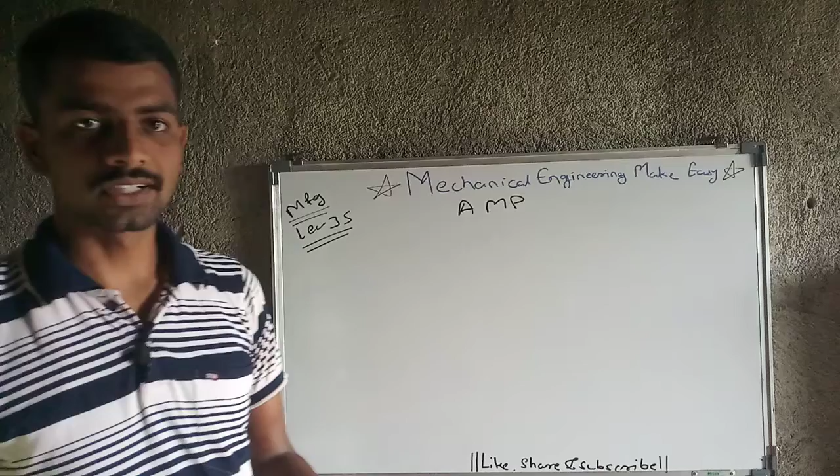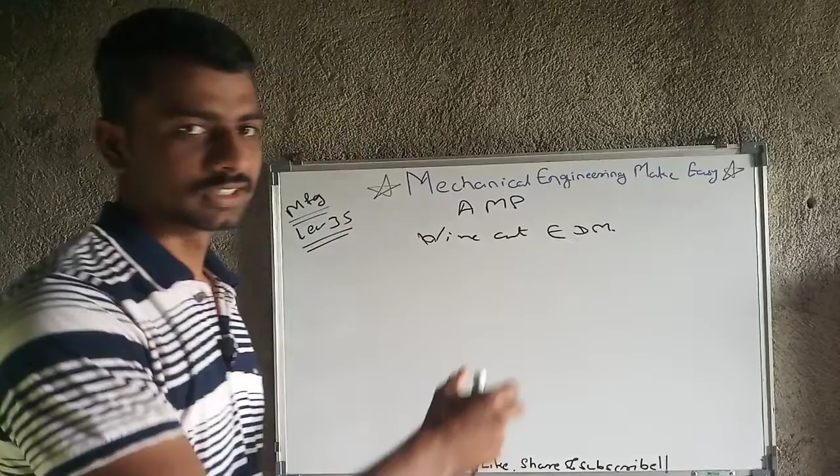Up till now we have covered electric discharge machining and ultrasonic machining. In this lecture we will cover wire cut EDM, that is wire cut electric discharge machining. Same principle as electric discharge machining, but here there will be a wire.

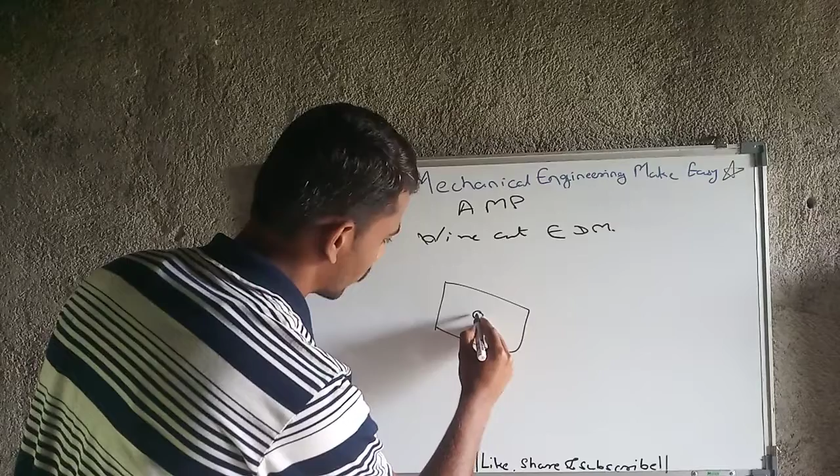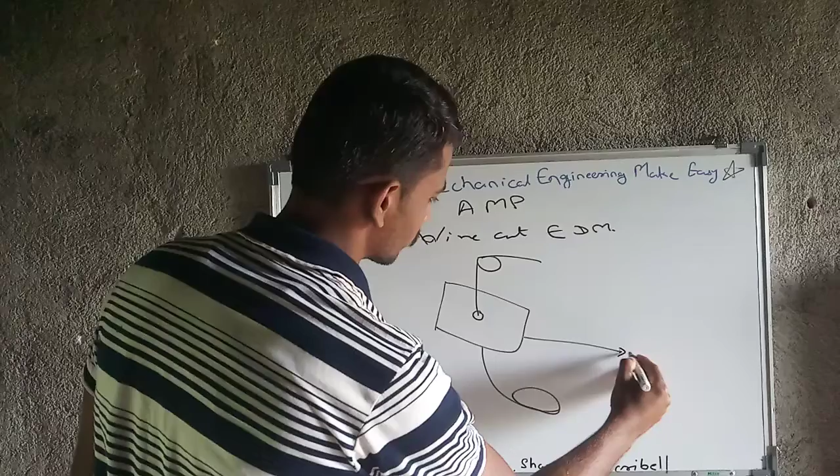How it will work: for example this is the workpiece. Here we will drill one small hole, and from that small hole the metal wire will pass, and that wire will act as electrode. The workpiece will be given positive supply.

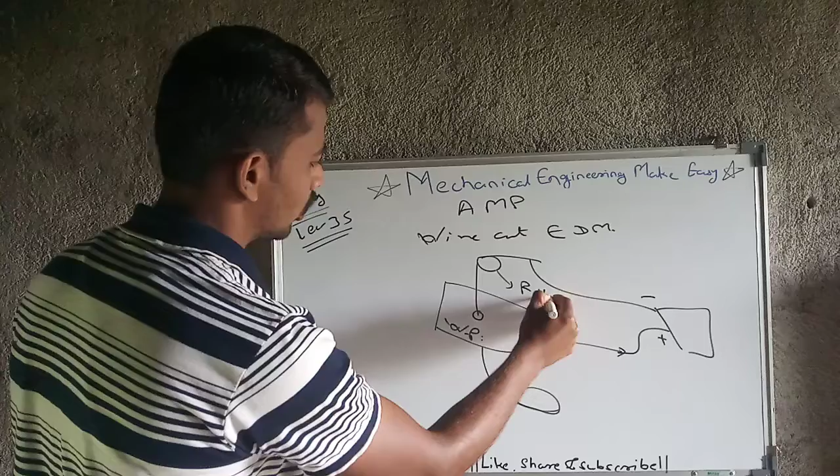That wire will act as electrode with negative supply. The workpiece will be on the work table, and according to our cutting direction we will move it to and fro, up and down, in all three directions. This is the roll, which will supply continuous wire.

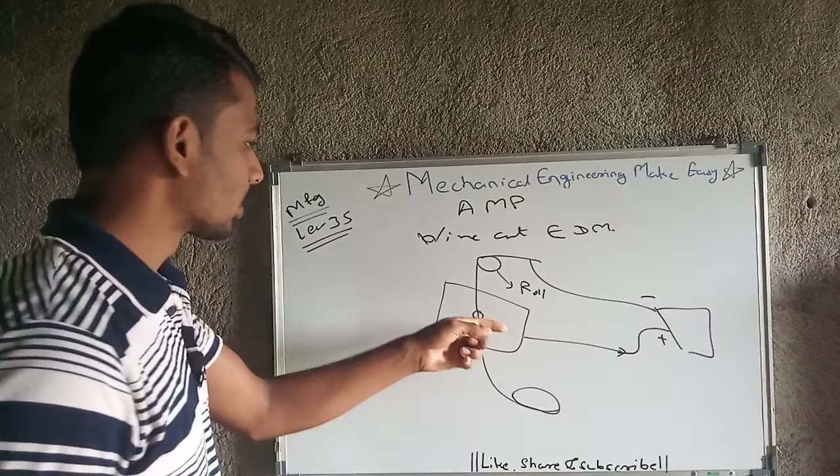Here again the same principle happens: negative supply on the wire and positive supply to the workpiece. On that gap the spark will be created, and because of that spark the cutting action happens. We will also supply dielectric here.

In case of electric discharge machining, the dielectric is nothing but kerosene, and here also we have to supply a dielectric so that in between that gap the spark will be generated. This is the very basic principle of wire cut EDM.

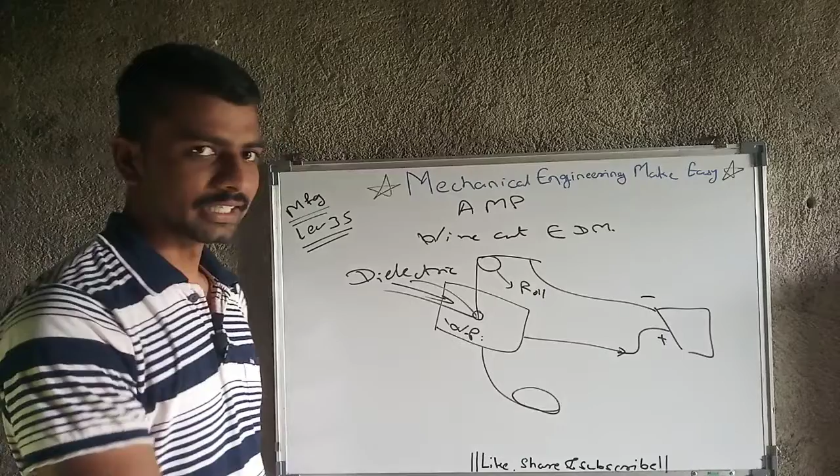The wire is continuously supplied because if that wire, which is very small in diameter, is not supplied again and again, it will break directly due to high heat and erosion reaction. That's why we supply this wire with the help of a roll: a supply roll and a collecting roll.

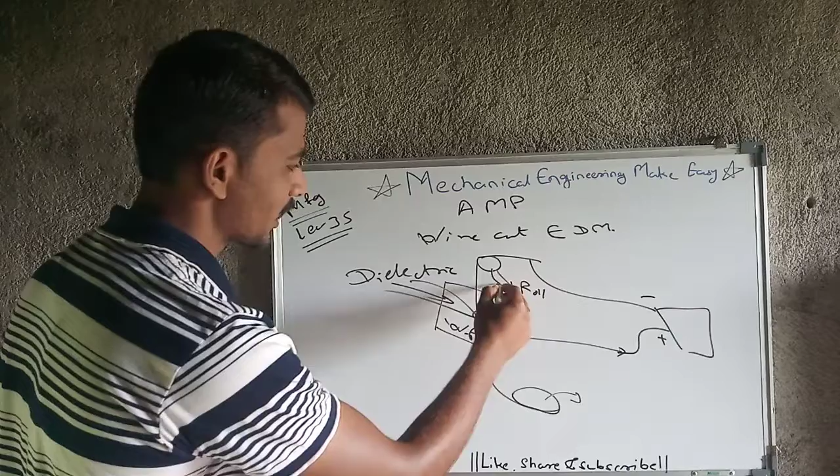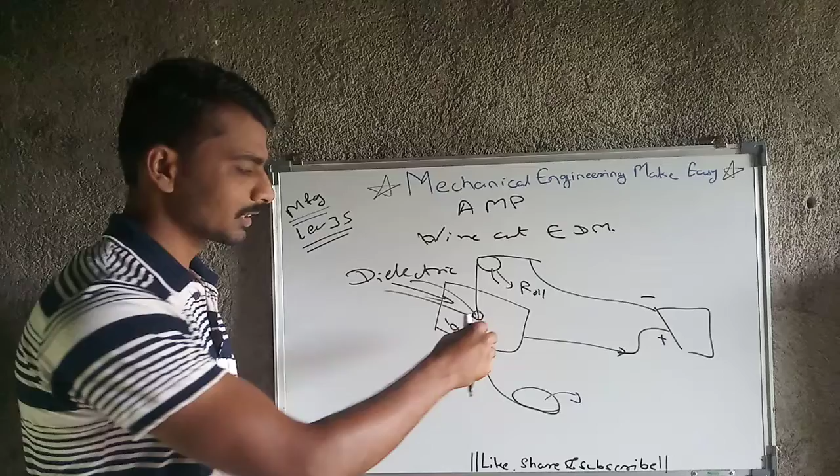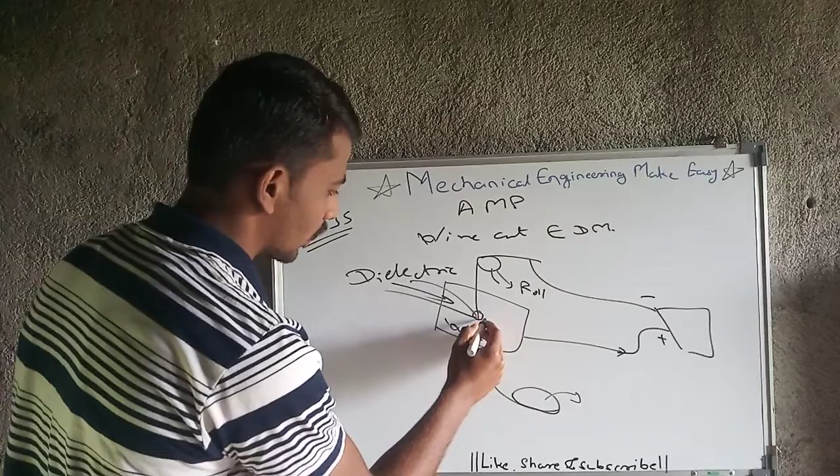This is the wire, given negative supply; the workpiece is given positive supply; and from here we supply dielectric. This is as simple as that. But first we need to drill one small hole in the workpiece, pass the wire through it, and then do the machining. We can cut in any direction needed. This is the simple mechanism.

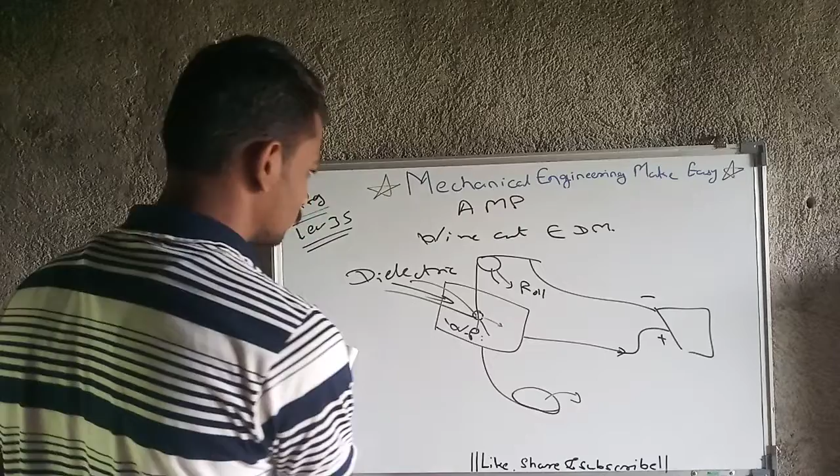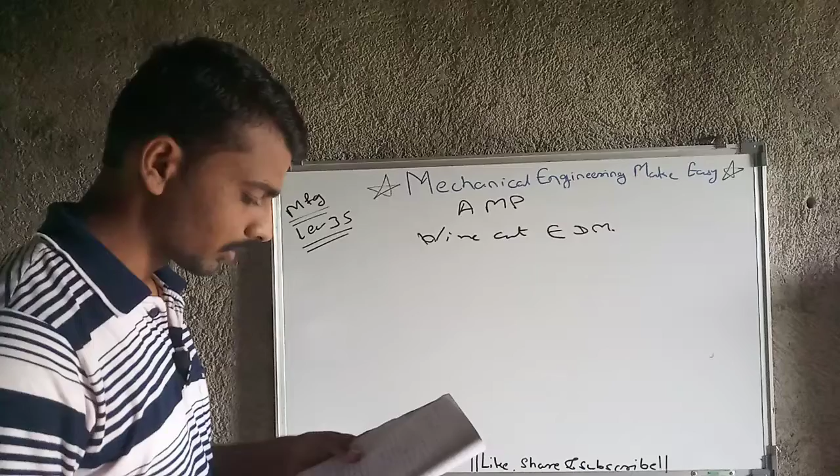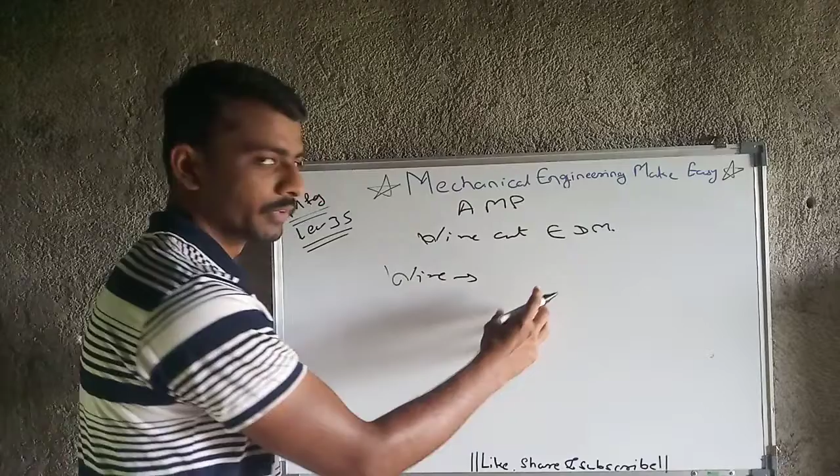Now we will move towards some analysis of wire cut EDM. First parameter: a very thin copper or brass wire is used. That wire will be very thin, and it will be copper or brass.

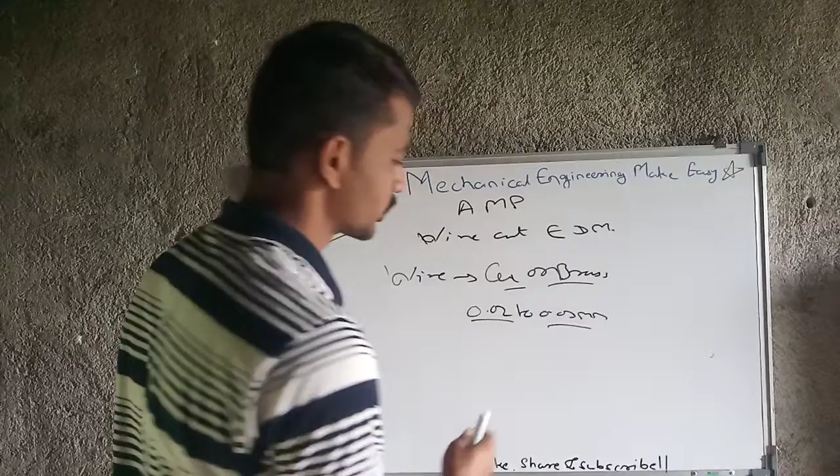The diameter of the wire will be 0.02 to 0.03 mm, you can imagine how small that is. That's why we need to supply the wire continuously. Next, the surface finish will be very good. Complicated shapes can be produced because these wires have only 0.02 to 0.03 mm diameter.

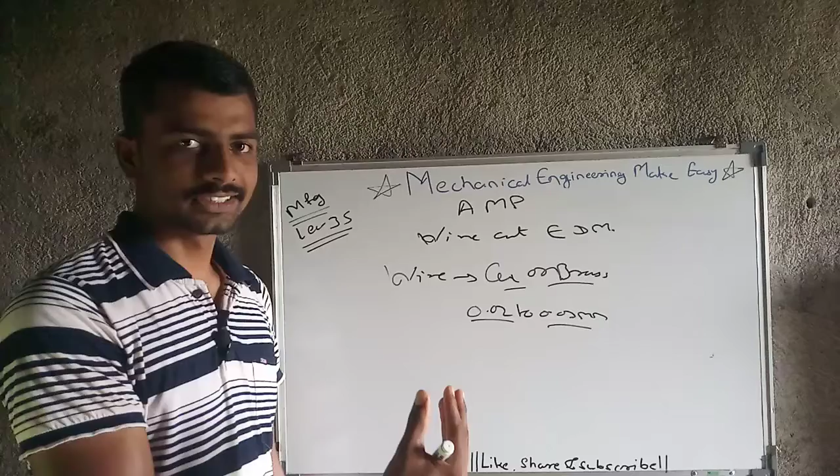We can move the workpiece in every direction, so complicated shapes can be generated very easily. Next, only electrically conductive materials can be machined. This is one limitation, because we need to supply voltage and current, that is electric power supply, to the workpiece and electrode. Ultimately only electrically conducting workpieces can be machined with the wire cut EDM method.

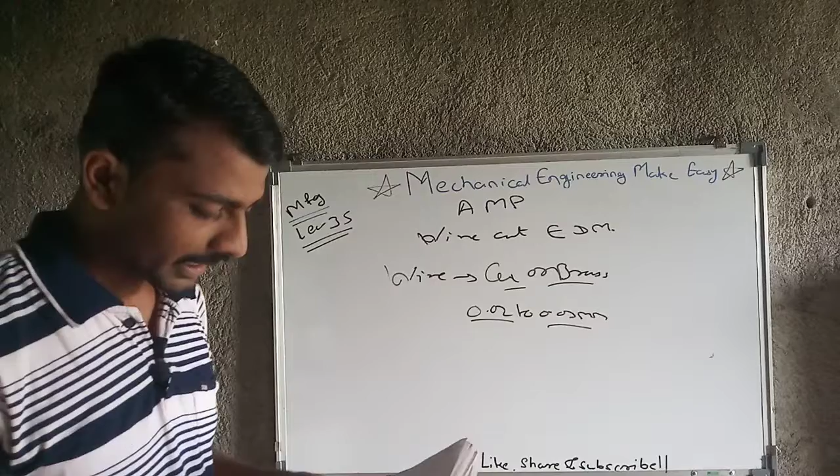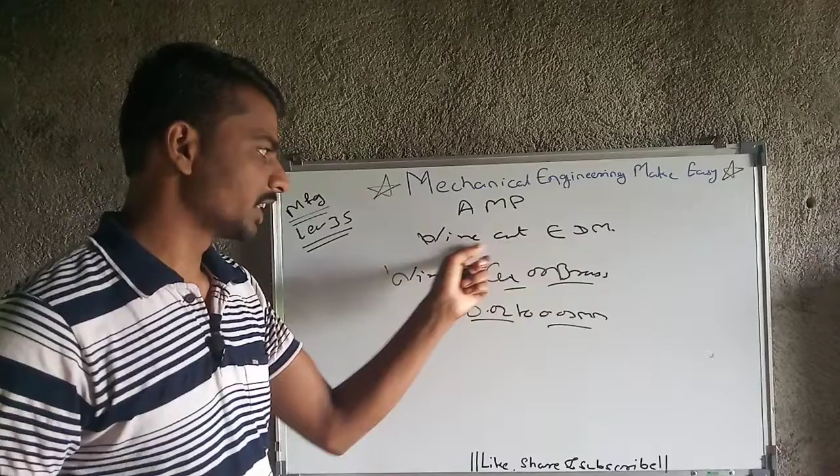Next is a skilled operator is required for programming. We need to program this whole method, all the operations, and then that operation will happen, like in a CNC machine. That's why a skilled operator is required for programming. These are some points of the wire cut EDM method.

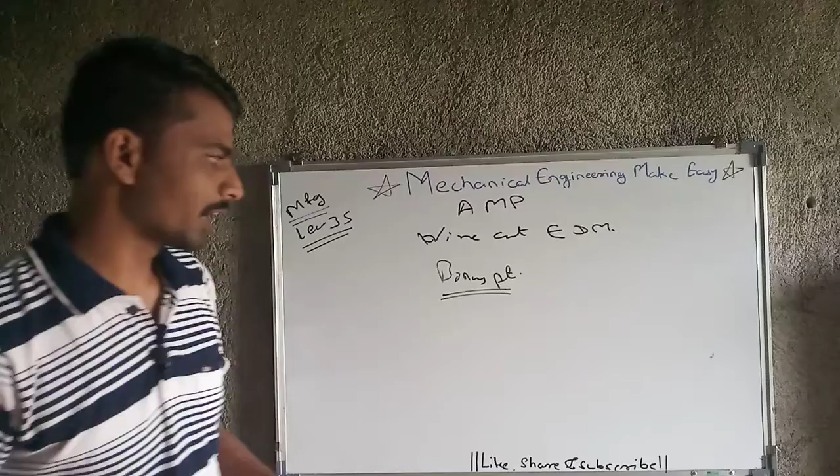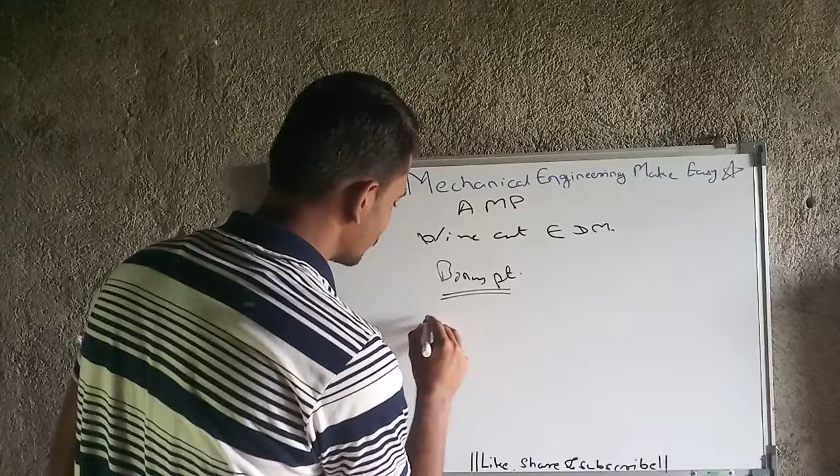Bonus point: discharge current is maximum 30 ampere. If current increases, the MRR will also increase.

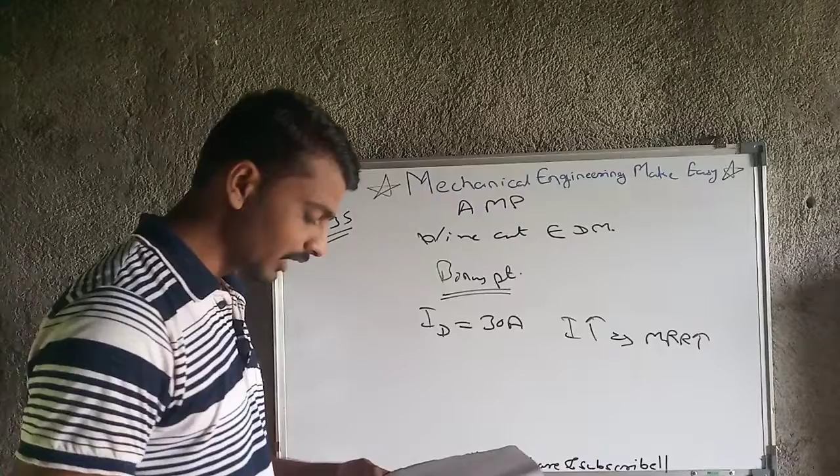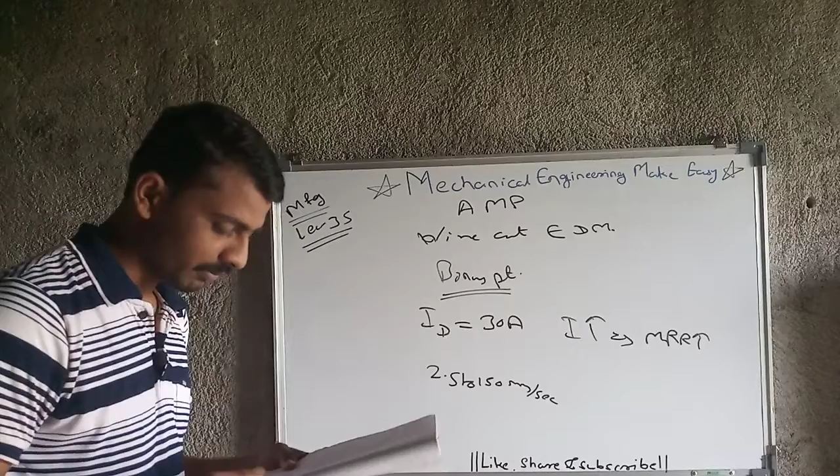Next is the speed of wire: the speed of wire will be 2.5 to 150 mm per second, this much high speed we need to implement there, along with the current. Then the maximum thickness that can be machined is 90 mm; up to 90 mm thick components we can machine with the wire cut EDM process.